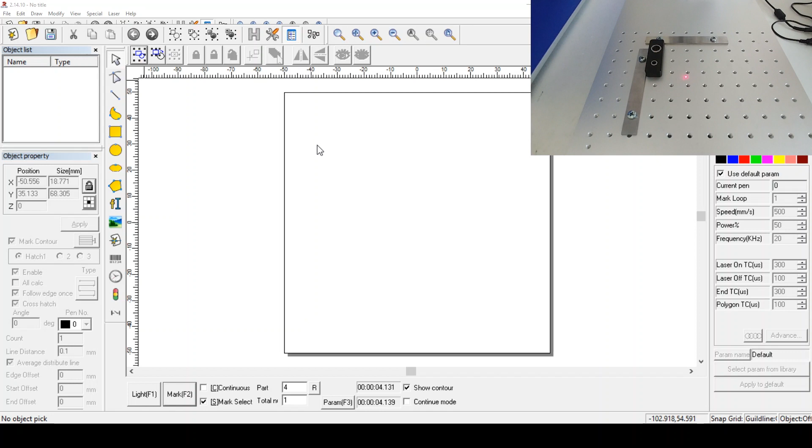First I'll open my sketch that I imported into EzCad. For our purposes, I've already saved my imported DWG as an EzCad file, so I'm just going to click open, and choose this tight sketch. It's got an EZD ending to it, and you'll see that pops up here.

I'm going to click this auto size button, so that zooms directly to resize, so it's in my field of view. One thing that's interesting about EzCad, pretty similar to most CAD programs, is that if you highlight something from left to right, it won't select that.

See, this tight is all one sketch, it's all one object. So if I click it, you can see it's one object. It doesn't include this text down here, the patent pending. So if I go left to right, it won't select it unless I choose the entire body of text.

Now if I go right to left and I choose any part of this, it selects the entire thing. It doesn't include the patent pending, that's a separate thing.

You can see over here that one is the hatch, which just means I filled in the text, it wasn't outlined. And this is the combine, which is actually text I created in EzCad directly. That was not imported from CAD.

So if I go right to left and I choose any part of the patent pending, it chooses the entire thing. And if I have this mark select button checked, this little checkbox on the bottom left, that's going to say if I mark right now, then it's going to include everything that's selected on the screen.

If I just have the tight selected and I choose mark select, it'll just mark the tight and not the patent pending.

So what I want to do now is see how this shows up on my part. All I'm going to do is choose the entire thing, and you don't have to choose mark select. If you unselect that, it would mark everything on your screen anywhere. Sometimes you'll have multiple things on the screen at once and you won't want to mark everything. That's the purpose of that.

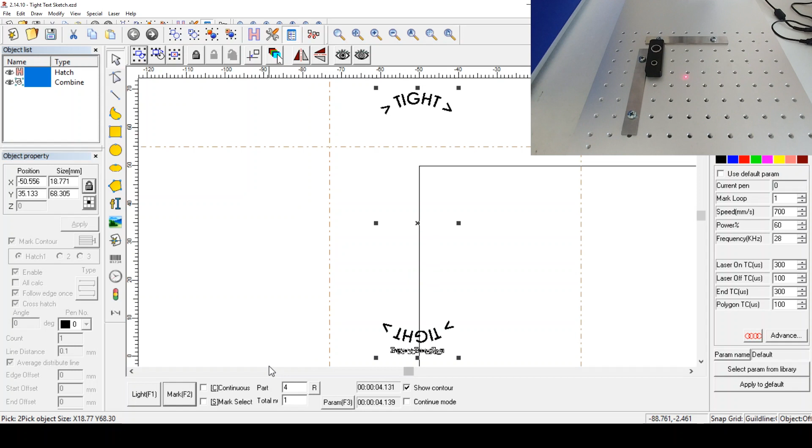So I'm going to select the whole thing, press the light here. You can also use F1 as a hotkey, but I'm going to choose this light button, and you can see it's now showing up on my part.

I've already got it positioned correctly, but if it were positioned, let's say to the right, then it would be over there. That doesn't look quite right, so you can just move it around with the arrow keys, or drag it around with the mouse.

I'll press stop, and send it back to where it was. So we'll just light it again to make sure it's in the right spot. And that looks pretty good.

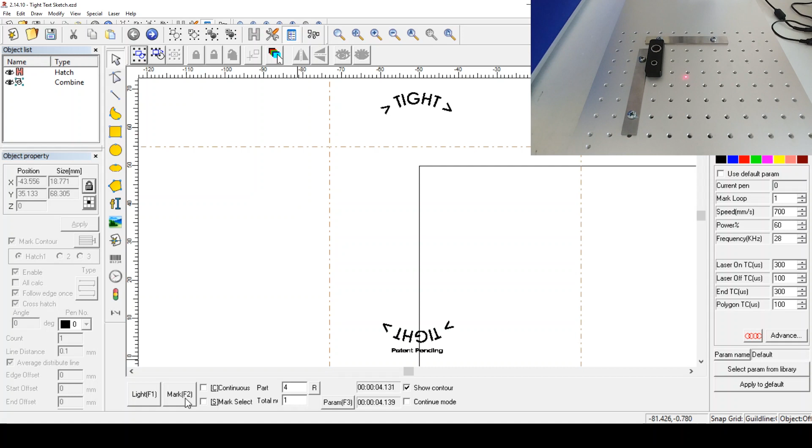So I'll press stop, and we'll do a test mark just to make sure it's okay. I'm going to choose mark select just because I like doing that. Down here it says it's going to make one part, and we've made a total of 4 parts.

I'll reset the counter. Our settings over on the right side here say that we're going to use the default pen, and we have the frequency set to 28. I think the lowest you can go is 20. That would be the most powerful, and 60% power.

Speed is going to be 700. That's kind of in the middle. You can go anywhere from very slow to over 1,000 millimeters per second, which is pretty fast. So I'm going to mark this part just to see how it looks.

So a couple seconds to mark it. Looks pretty good. So now I want to say, let's mark a bunch at a time. How do we do that?

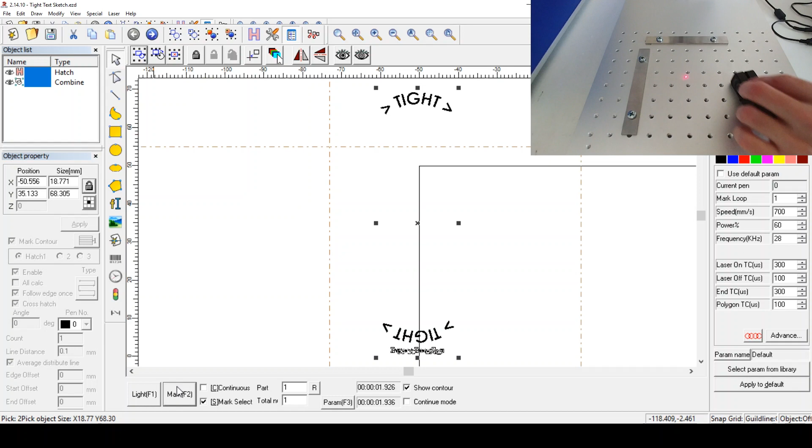Let's say I just want to mark 3 at a time. Now there is a top and a bottom to this part, so I want to make sure it's oriented correctly.

So what I'm going to do is keep the entire thing selected, and I'm going to go up to this modify button at the top. I'm going to choose array, and I'm going to choose rectangle.

These 2 buttons up here just control the order in which it marks your array of, let's say, sketch objects. I don't really care if it goes left to right, top to bottom, whatever it wants is fine. I'll go left to right.

So I want 3 of these next to each other, so my number of X objects is going to be 3. I'm just going to have one row, one column, one row, 3 columns. So I'm going to say 1. I don't want to repeat this in Y.

It's pretty much the exact same as patterning something in regular CAD software. For array X distance, these are 1-inch parts, so I'm going to go over 25.4 millimeters, 1 inch, and I'm not going to have any Y, but if I were, and I were doing 2, these are 3-inch parts, so it would be about 76.

So then you have the option of choosing to calculate by offset distance or by graph distance. Graph distance, they explain this in the manual, and if I can, I'll show a picture of it. They show kind of edge to edge as graph distance. So if I had them separated like this, it would be the distance between these 2 parts.

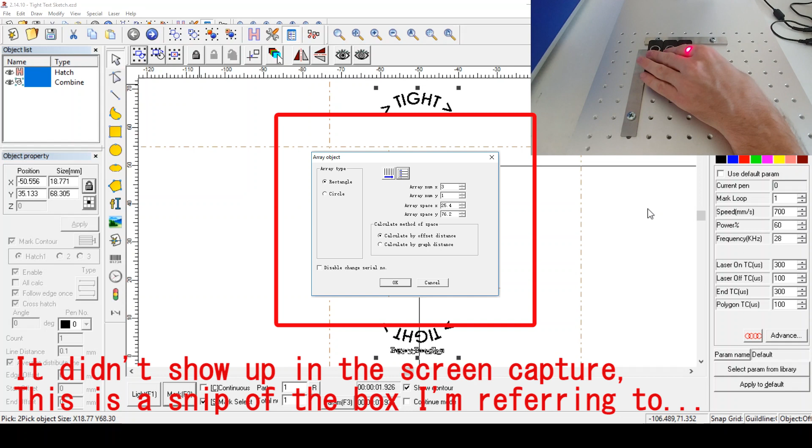For our purposes, I think it's a lot easier, since I have the parallels laid out, just to say from center to center, it's 1 inch. So that's all I'm doing there, and I press OK.

It will create the duplicates, and all I'm going to do is press zoom all again to put everything in the center. I'm going to highlight all 3 of these, and you can see everything on the left here is selected, all of the objects.

I'm going to press light, and you can see how that shows up when it's lit, kind of going across every single part you have there. I'm going to press stop, and if you want to make sure your spacing is correct, you can just select one of these. It's a little bit easier to see, and press light, and you can just see how it looks on the 3rd object.

And I'm pretty happy with that. So I'm going to choose all 3 objects at once, and you can test mark 1 and then replace it, whatever you're comfortable with. So I selected all 3 of these at once, have the mark select button checked, kept all my settings the same, and now I'm going to mark them.

And you can see that marked from left to right. Looks like it came out pretty good.

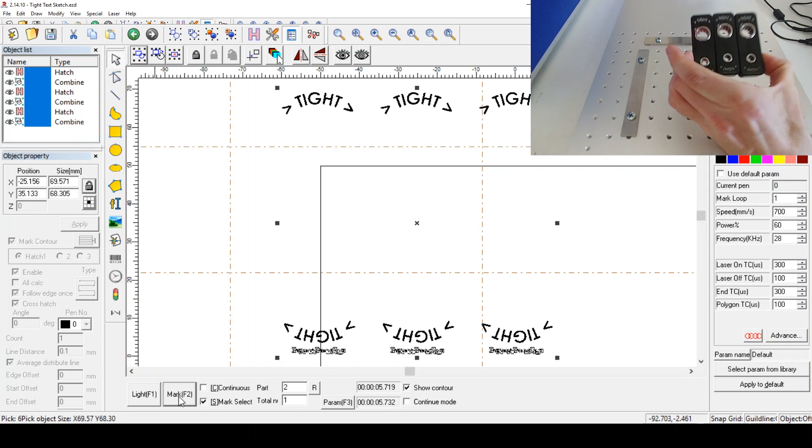I have done as many as 10 of these at once by doing 5 per row. The upside to doing that is you just click it and you can walk away for a minute or so. The downside is if you misposition a part, or put something in upside down, you could end up scrapping 5 parts or more at once, which I have done, and that's not so good.

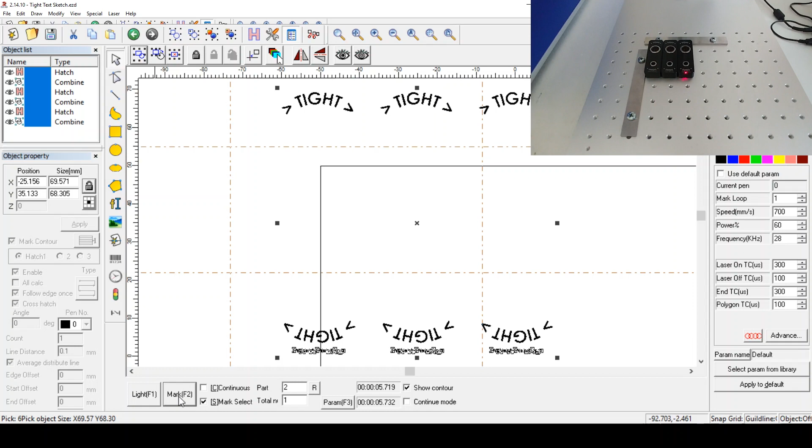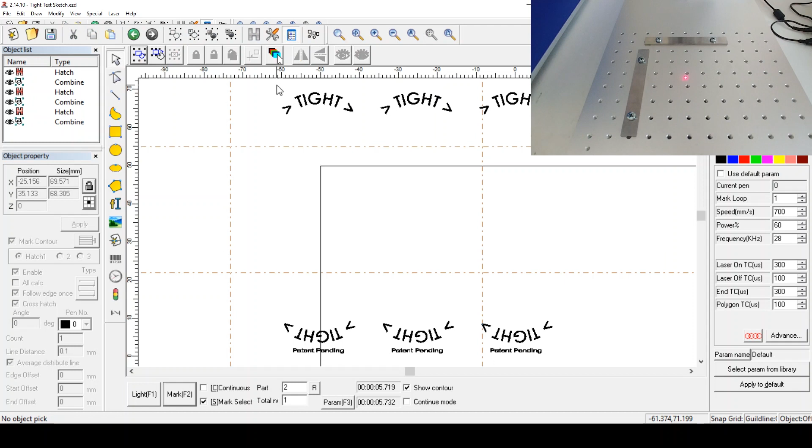So let's try to do 2 rows now. So I'm going to take, well, we don't have to start from all 3. Let's get rid of this first array. I'm going to highlight this again.

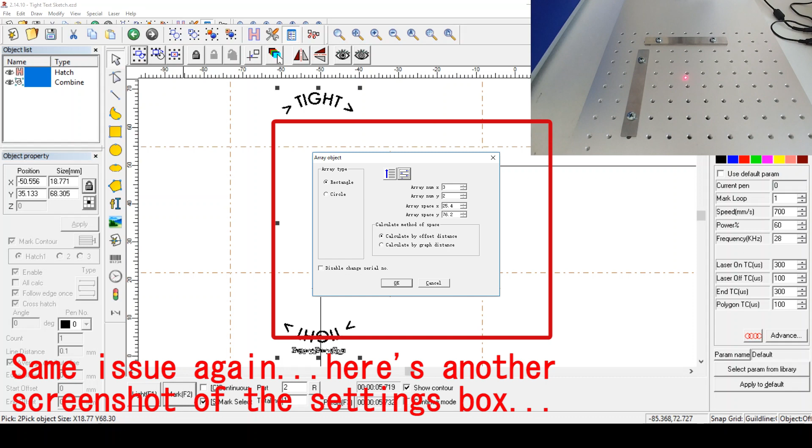I'm going to go into modify, I'll go into array, and this time we're going to still do 3, and then let's do 2 rows. So I'm going to keep my 76.2, and we'll calculate by offset again. So I'm going to say OK.

Now we have 6 total parts here, and I'm going to do the exact same thing we did before, but I'm going to load 6 of these this time.

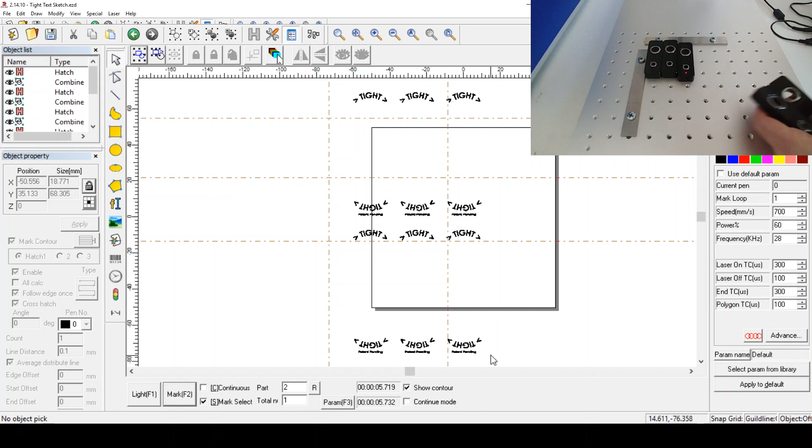Now I'm going to select the bottom right part, and I'm going to light it just to make sure I'm in the right position. That looks pretty good. And I'll select this one as well just to make sure I haven't made any errors. That looks fine.

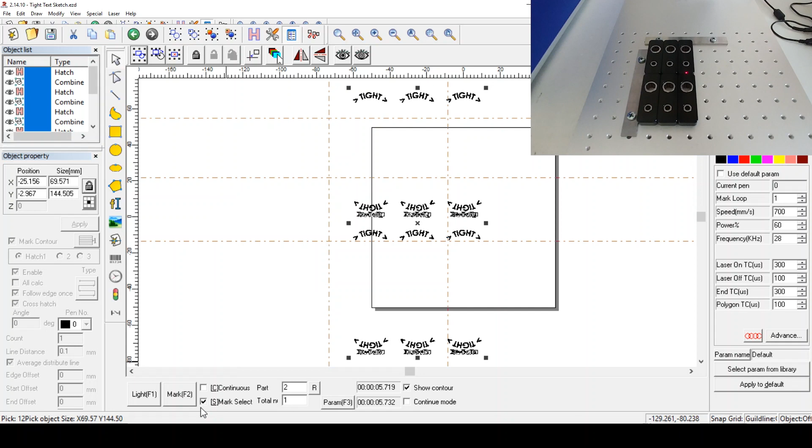So I'm going to select everything and keep my mark select box checked, and I'm going to go ahead and mark.

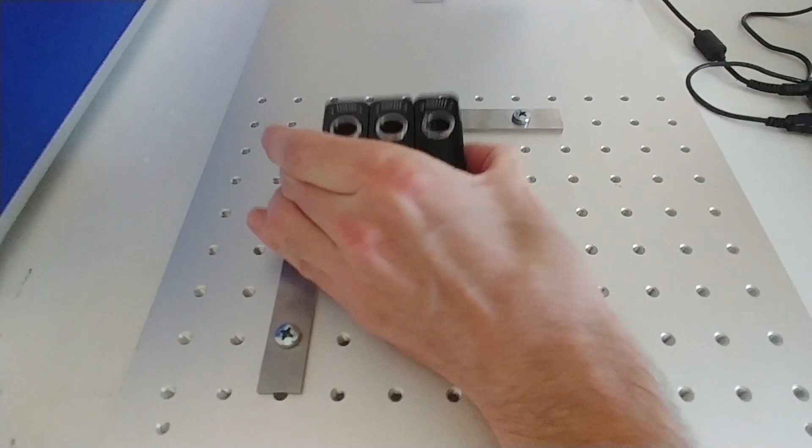So that looks like it worked just fine. So you can see it's a little bit faster if you can load 6 parts at once versus 1 part at once. Only downside is you increase your risk of scrapping things just a little bit.

And it can sure be fast to scrap parts, especially since this is probably the end of the process here, after you've got all the money put into your part. But I just wanted to show you, this is one of the things that I was wondering about when I bought the laser and when I started using EzCad.

Could I do this? Was it easy to mark multiple parts at one time? And I found that, yeah, not a big deal. So hope that's helpful. If you have any questions, go ahead and leave them in the comments.